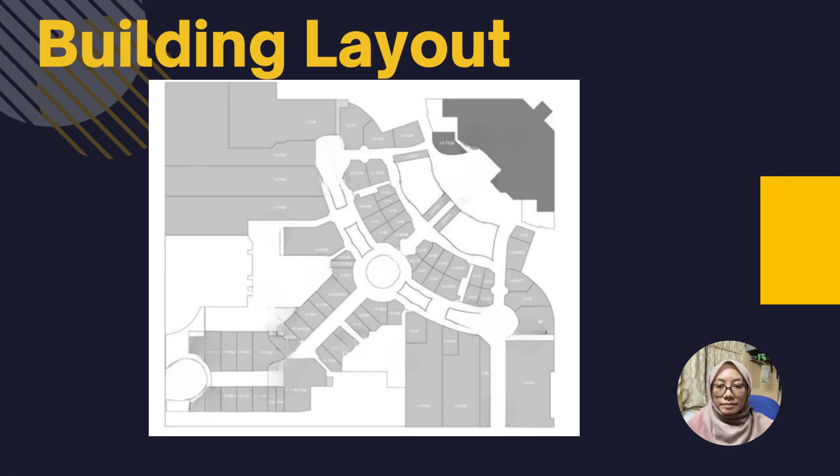Substructure component of the complex. The location of this mall that we want to construct is in Pagoh Educational Hub. The foundation selected for us is a shallow foundation called a raft foundation, which supports the building and disperses its weight to the ground.

In a raft foundation, the footing is dispersed across a large area, taking the stress of the columns and distributing the load evenly over the entire span of the footing. This type's bigger area is closer to the soil, which allows the load to be distributed over a much larger area with less stress. When laying a foundation on poor quality soils, a raft foundation is advantageous.

Raft foundations are used in buildings where the work of waterproofing the substructure has to be complete. Engineers recommend a raft foundation if the water level is high in certain development zones.

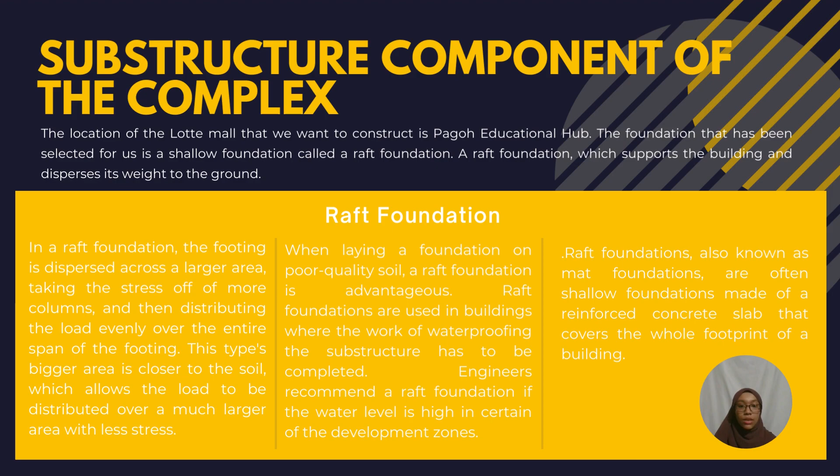Raft foundations, also known as mat foundations, are often shallow foundations made of reinforced concrete slab that covers the whole footprint of a building. If a traditional raft foundation is insufficient, it can be strengthened by the addition of piles, resulting in a pile raft foundation.

The type of soil in Pagoh Educational Hub is soft clayey sand, which is prone to swelling and contracting. It is inappropriate for strap foundations and footing because of its limited bearing capability. In this situation, a pile foundation is used until the stable strata is reached and is acceptable. For the substructure of the building, the piles are excavated further.

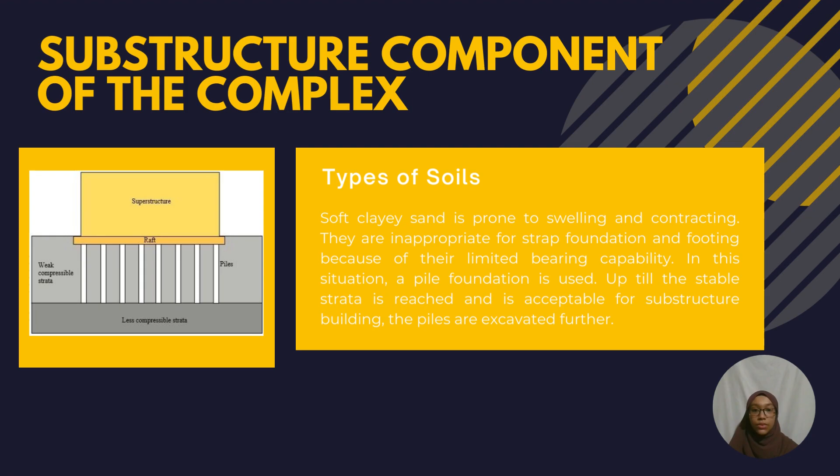The process of piled raft foundation. The area where the foundation will be placed is first surveyed and excavated to the level at which the foundation will be built. To prevent uneven settlement, the excavation's base has been leveled.

Pumping is done to remove water and begin further excavation if the soil is wet after excavation or if the water table is reached. To prevent water from penetrating the slab, a waterproofing membrane is provided at the base. The soil also will adhere to the concrete once it has been poured.

Cement sand paste is poured. After deciding on the slab depth, concrete is put to the necessary height and allowed to cure using a variation of methods.

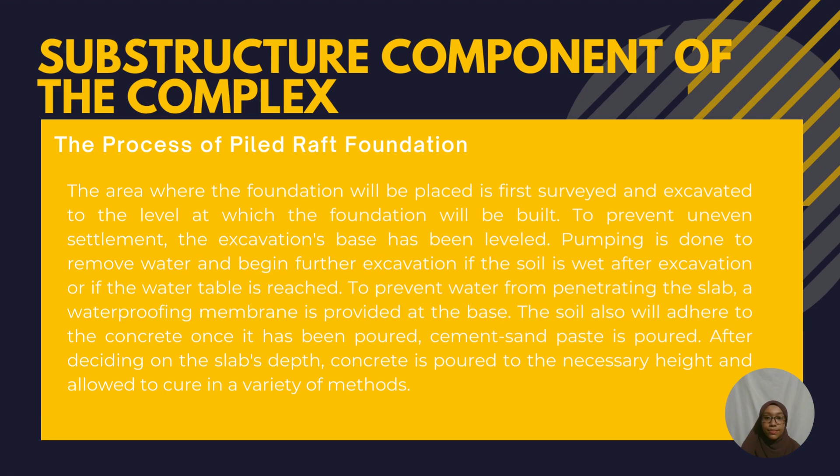Assalamualaikum. I will talk more about the superstructure component of the complex. There are 5 things in this topic.

The first one is roof. The best type of roof for our shopping complex is the flat roof. A flat roof is more convincing and affordable than a sloped roof. In making this roof, we can decrease costs from the material and spend less time than with a sloped roof.

The second one is floor. This ground floor structure supports the room content and the user of the weight itself. If the floor is the ground floor, it will provide more resistance to ground moisture and heat loss.

The third one is upper floor. Right after we are done with the ground floor in the construction, the upper floor must be done to complete the criteria of the shopping complex. It's considered as the requirement of the second floor.

The fourth one is column. In the making of the column, it's one of the most important uses for structural reinforcement, much like a beam. Columns are vertical structures that transmit the compressive load. The column supports the floor from above.

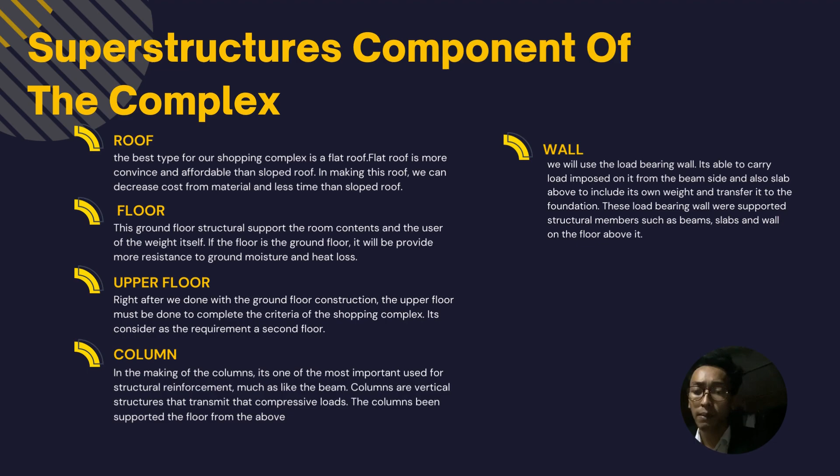The last one is wall. We will use the load-bearing wall. It will be able to carry the load imposed on it from the beam side and also the slab above, including its own weight, and transfer it to the foundation. This load-bearing wall will support structural members such as beam, slab, and wall on the floor above it.

Next, we will talk more about step by step in this superstructure component. The first one is floor. There are several steps. The first step, we have to excavate the area. The second step, we have to finish the subterranean concrete column.

The third step, we have to place the form of the slab. The fourth step, we have to install steel reinforcement. The fifth step is we have to pour the concrete, and then the last step is we have to let the slab cure. This is the example of the floor, the ground floor.

Next, we go to the upper floor. There are just 4 steps. The first step, we have to assemble and erect the formwork for the slab. The second step, we have to prepare and place the reinforcement for the slab.

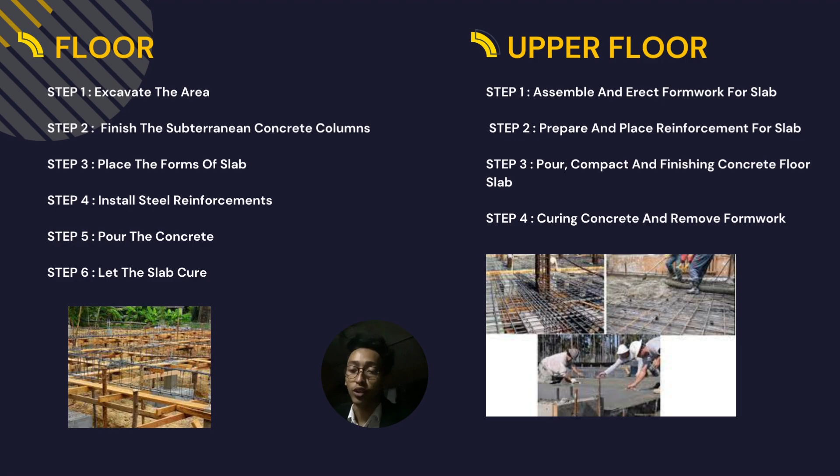The third step, we have to pour, compact, and finish the concrete floor slab. And then the last one is we have to cure the concrete and remove the formwork. Here's also the example of the upper floor.

Next, we are going to the column and wall. For the column, there are also 4 steps. The first step is we have to do the column layout work. After that's done, we go to the next step.

We have to do the column reinforcement work. The third step is we have to pour concrete into the column. And the last step is we have to remove the column formwork. This is the example of the column formwork.

Then the last one is the wall. There are only 5 steps in making the wall, which is a load-bearing wall. The first step is we have to do the formwork of the concrete wall. Then the second step is we have to construct a joint in the concrete wall. The third step is we have to pour the concrete in it.

The fourth step, we have to remove the formwork. Then the last step is we have to cure the concrete wall. This is the example of the wall making.

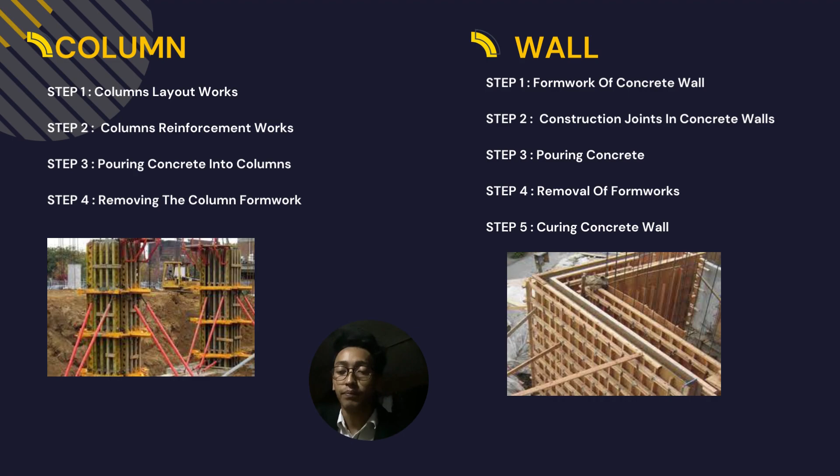It's anticipated that the project will include public or private plaza areas, parking, and major landscaping. We also recognize the importance of creating a place with a sense of community, providing space for the project residents, shoppers, and visitors to interact, shop, live, learn, and enjoy.

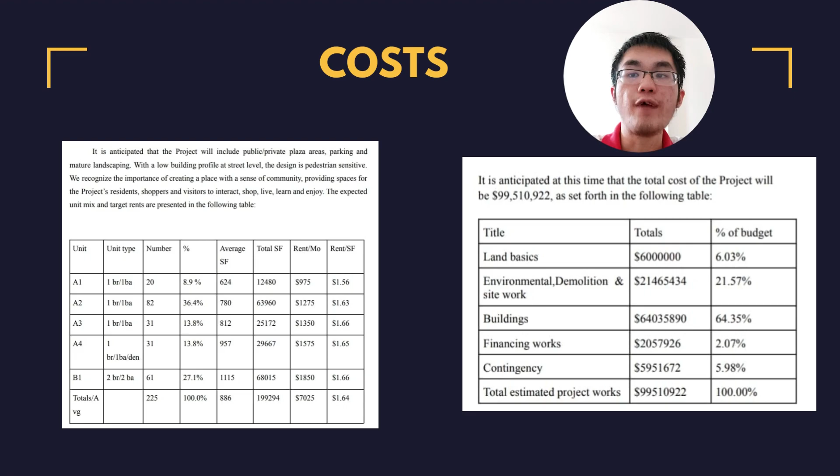It's anticipated at this time that the total cost of the project will be 99,510,922 as set forth in the following table. This includes the land basics, environmental, demolition, and site work, buildings, financing works, and contingency.

Next is the costs. Typically a project like the one proposed here will require between 25 and 35% equity and 65 to 75% debt, and this depends upon the specific lender criteria and how much of the project is pre-leased or pre-sold.

It's unlikely that this project, or any other plan for the development of the property, can be completed without substantial financial incentive assistance. So we need economic assistance from taxes.

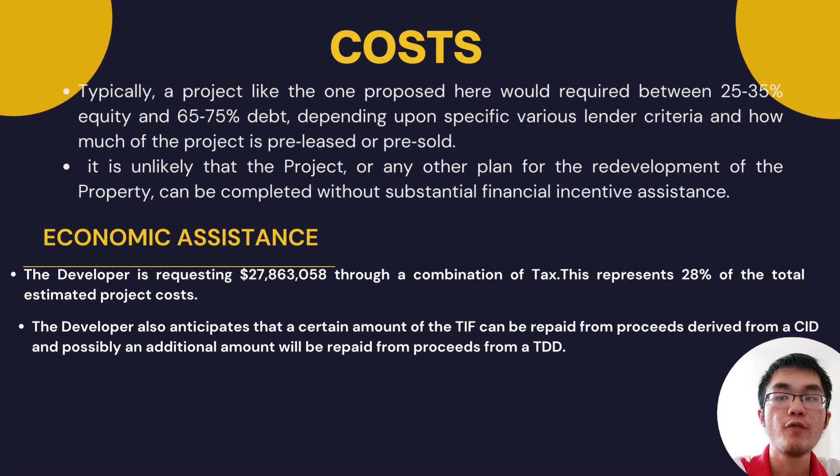The developer also anticipates that a certain amount of the TIF can be repaid from proceeds derived from a CID, and possibly an additional amount will be repaid from a TDD. In addition, although not being requested at this time, the possibility exists that a portion of the project's property tax abatement may be requested. If such a request were made and approved, the developer understands that the TIF will have to be adjusted accordingly. Next is the management.

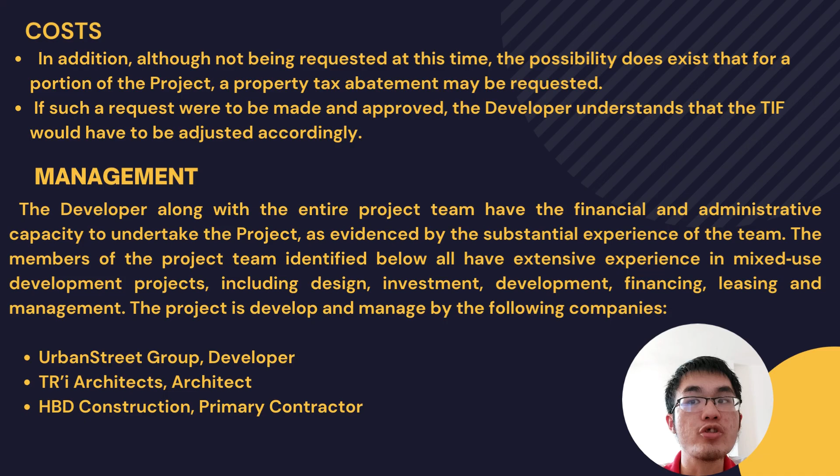The developer, with the entire project team, has the financial and administrative capacity to undertake the project. The members of the project team identified below all have extensive experience in development projects, including design, investment, development, financing, leasing, and management. The project is managed by certain companies like UrbanStreet Group Developer, TR'i Architect, and HBD Construction primarily. So the next one is the project planning.

The project will be completed in 4 phases. Phase 1 is environmental remediation. The second phase is the demolition of the existing structures. The third is site work and installation of on-site utilities and stormwater management systems. The fourth phase is the construction of new improvements on the property.

The project schedule: in March 2015 we begin work on the TIF and draft CID. In April 2015, we work on the redevelopment plan and cost-benefit analysis. In May 2015, we file the petition. In June 2015, environmental remediation begins.

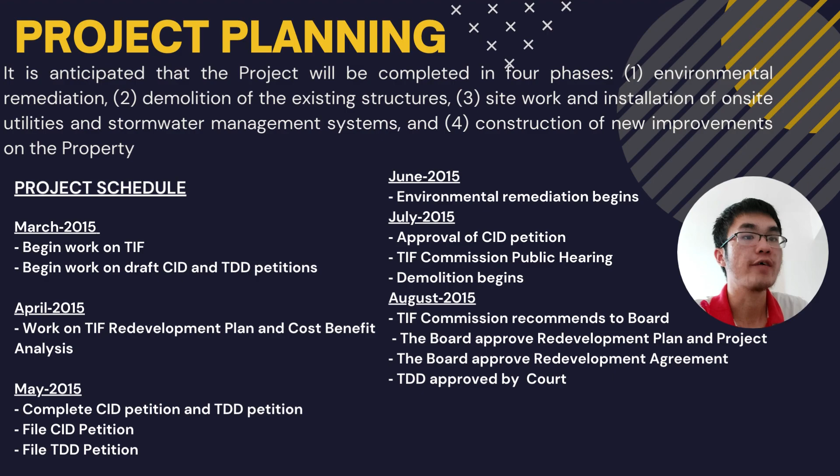In July 2015, the petitions are approved and demolition begins. In August 2015, the board approves the redevelopment plan and project. In September 2015, there is approval of the imposition of sales tax and approval of the intergovernmental agreement.

In October 2015, demolition continues and site work begins. In November 2015, site work continues and stormwater work begins. In March 2016, site work continues and construction work begins. In May 2016, demolition continues, and in September 2016, stormwater work is complete.

The last schedule milestone is June 2018, when work completes on construction and the project is also completed.

As a conclusion, Pagoh needs more for students to replenish the needs and requirements. The purpose of this project was to analyze the superstructure and substructure for the building, because there are very few shopping complexes or malls at Pagoh. So our team's goal was to create a shopping mall or complex for students to make the most of their holidays or weekends while attending classes at Universiti Tun Hussein Onn Malaysia. There are a variety of arcade shops, food courts, offices, service yards, and others in the shopping mall.